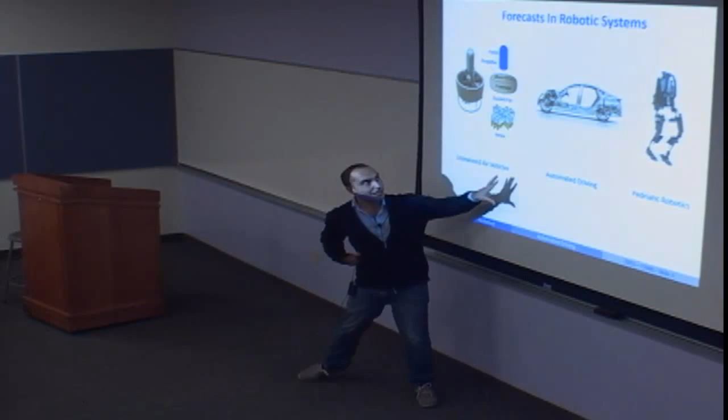I've been working with robotic systems in the past. This was an unmanned flying vehicle at Honeywell in 2002. We were the first to have these big machines flying around, used by soldiers. A lot of my activities are on automated driving, autonomous driving. And more recently I've been working on a project with Kazerooni doing pediatric robotics.

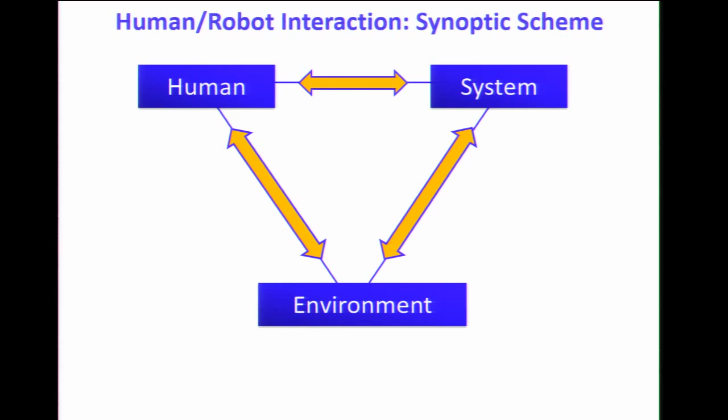So I work with robotic systems, and if you look at all of this, what they have in common is a human actuating or giving commands to a system that moves in an environment perceived both by the system and the human. In the case of cars, which I know best and work with all the time, there's a human that sends commands to a vehicle that moves in an environment perceived by the human and the vehicle, and the loop is closed.

The main point of my research is forecast. My lab focuses on the use of forecasting control, and I claim that we can drive pretty well because humans use forecasts. Actually, I'm giving a strong statement: probably the most interesting control problems left are the ones handling forecasts. Otherwise they're either impossible or too easy.

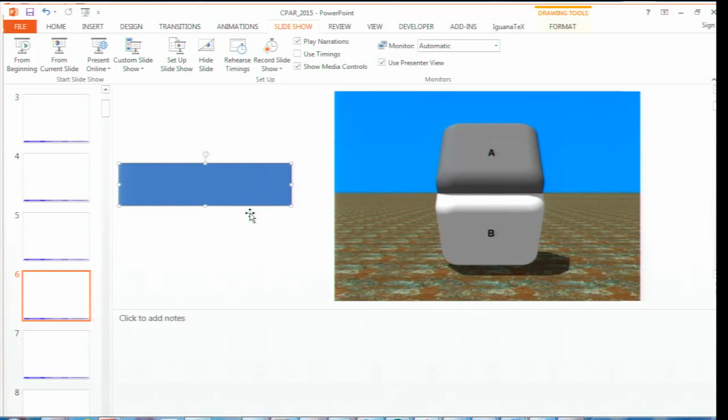You don't believe? Okay, I'll show you that it's true. It's amazing, when I saw this I said okay. And because there's a lot of stuff, look at this, I'm just hiding this part so you don't see. I'm going to hide the part where it doesn't give you the 3D perspective.

Come on... yeah, same color. So again, your brain forecasts colors a lot. You have forecasting mechanisms, it's quite amazing. This is probably one of the most interesting things I've been interested in for the past 20 years, the use of forecasts in control. Amazing, right? It doesn't look the same color, but it is the same color.

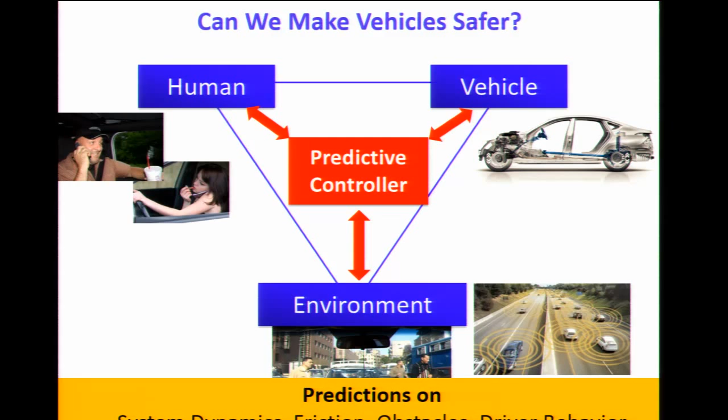So how do we design a control that forecasts the vehicle dynamics, the environment dynamics, and the human behavior, so that we make the whole driving experience safer, or robotics experience safer if you change your systems, and eventually you can make it autonomous.

So again, two goals: overview of my activities, since this is a Cpar seminar on human-vehicle interaction, and one research result. I've chosen analog optimization as an example of something a bit different from what's out there, being futuristic with what we should do at university, looking maybe 50 years ahead.

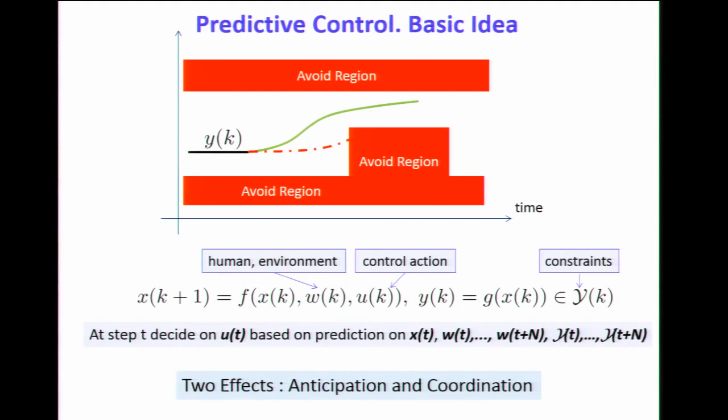So what are the challenges going from this simple idea of using a forecast in your control to making it work? Where do I start from? Three questions: what is a good model abstraction? Do I really need forecast? What is the value of uncertain predictions? Do I need to use forecasting control? And how do I make it work? Where do I start from, do I really need it, how do I make it work?

So I'm going to use this part, a good model abstraction, to tell you a little bit about our research activities, and also as a message to young graduate students: know the system before trying to control it. In predictive control design, I'll tell you about one research topic here. If you look at the car, the human moves the vehicle. Today, the way we actuate the car is by sending a signal to the low-level control systems.

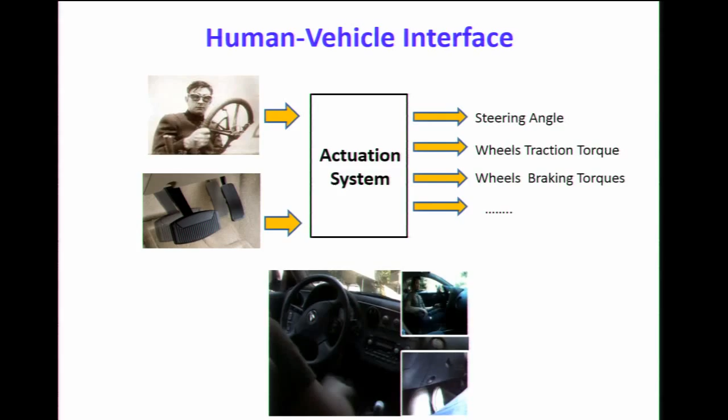When you change your steering angle or push the brake pedal, you're really referencing a low-level control system. For instance, if you push the brake pedal, you're sending a PWM signal to an electronic control unit, which changes the pressure inside the braking pads.

And really, what you want is not what you get. So this is experiments that we do, but there is uncertainty in the low-level actuation.

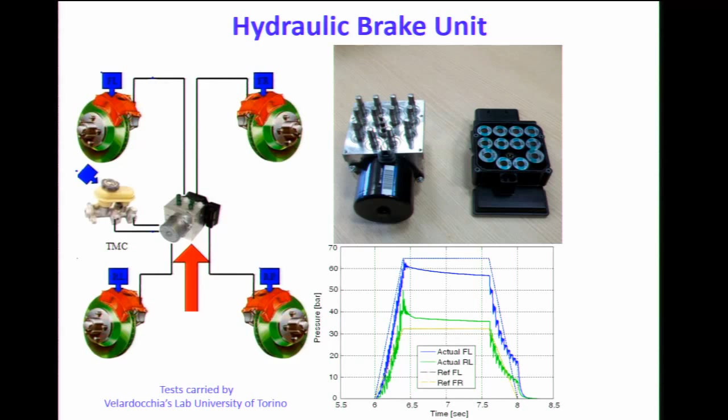And by the way, if you take a modern car, there's a lot you can do. You can brake all four wheels, actuate the engine torque, and also distribute the torque front and rear. And of course you can control steering as well. This is a Hyundai Genesis 2015, it has all these forms of actuation. Interesting control problem there.

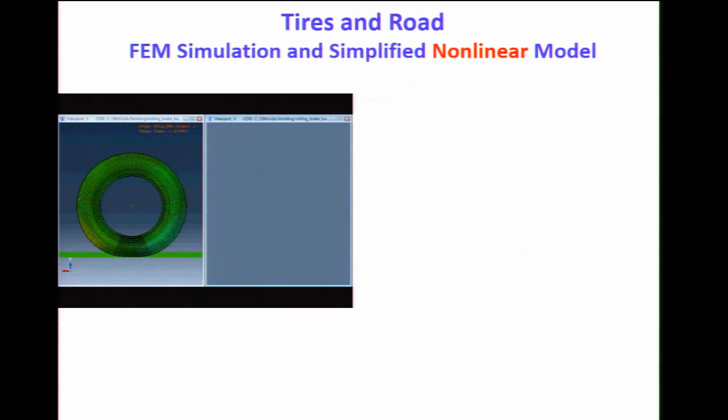Now that you've sent the signal, the vehicle moves in the environment, and there are two types of interactions. The vehicle is a box. The lower side interacts with the road, the asphalt, and around you with obstacles. So the tire is the reason why things move, and these are tough objects, viscoelastic materials. There's an entire conference on tires.

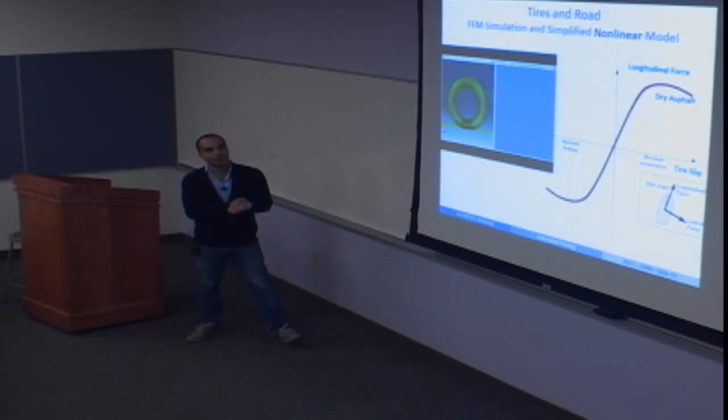This is the force. What I've depicted here is the force to the tire as a function of what's called tire slip, the difference between the vehicle speed and the wheel speed. It comes from finite element models of the tire deforming under acceleration. A lot of people doing vehicle dynamics use this type of nonlinear model. If you accelerate, your force increases up to a point where the tire slips and you actually get less traction. The same happens with braking.

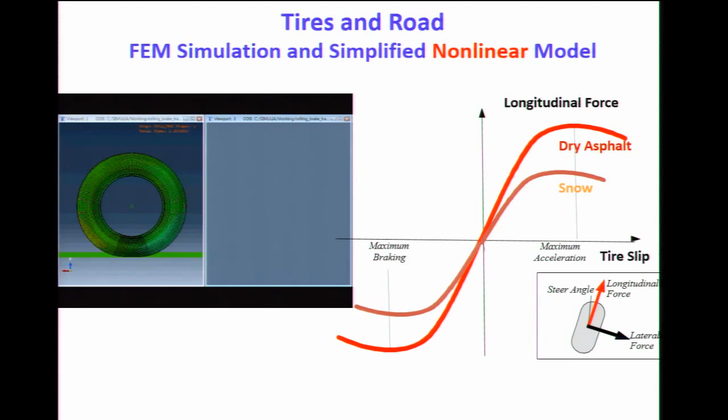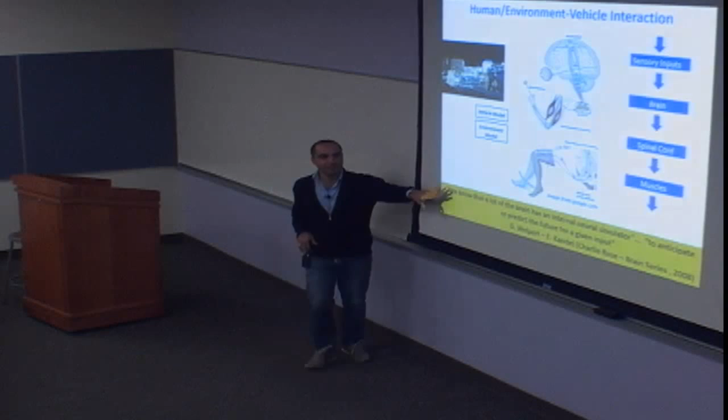And once the car moves in the environment, this environment is perceived both by the car and the human. This is where the neuroscience community has been focusing for many years. What has changed in the past year is that there's a Nobel Prize - Eric Kandel is a Nobel Prize neuroscientist - and they've embraced this idea that we have a simulator, a forecaster in our brain, a model that makes forecasts.

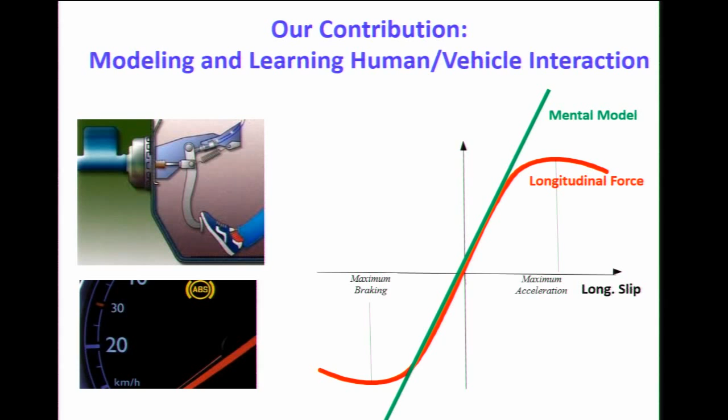And if you use this concept, you can explain why we need traction control and anti-lock braking systems. Your mental model in the brain is a linear model. A lot of our brain's processing for mechanical systems is identifying simple linear or piecewise linear models. So we have a simple linear model that works okay in this region, but when your wheels are slipping, in acceleration or braking, you need a control that takes over because there's a model difference. This is why you need traction control and anti-lock braking systems - those are production controllers that help you in this region.

So what I've been doing a lot of in our lab is focusing on real-time data-driven human driver models, and the reason is to have better human-vehicle interaction and also fast training of less skilled humans.

Imagine if I want to teach people how to do complicated parking. Can I design algorithms to teach people to do parking?

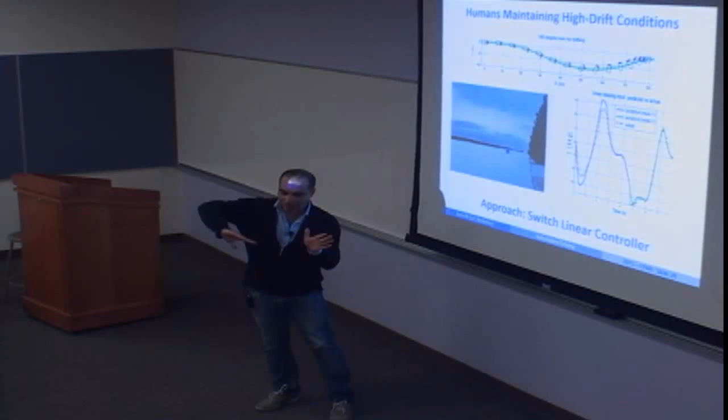This is in Michigan on snow, and only expert drivers can do this. Basically what they do is first destabilize the vehicle, go into a high drift condition, and then stabilize it back and rotate. So we were asking, can I learn from the expert driver, and can I teach this?

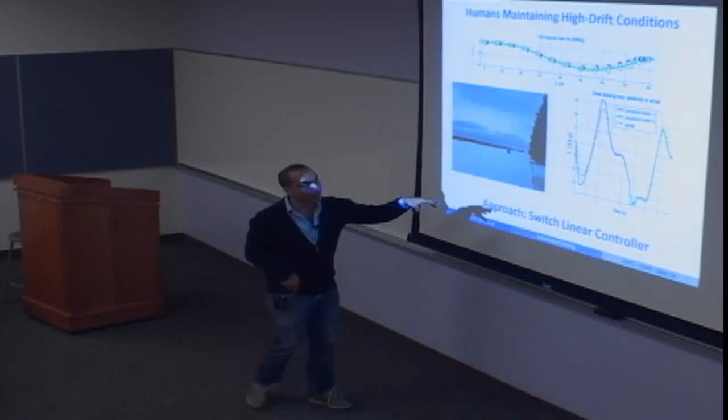It was interesting research from Teresa, who is graduating in a few weeks. A switched piecewise affine model, with two modes - destabilizing versus stabilizing - works extremely well. So well that we can actually use the same model identified from the driver to run the car autonomously. So you would see the car doing autonomous drift and 180-degree maneuvers from this controller learned from the driver.

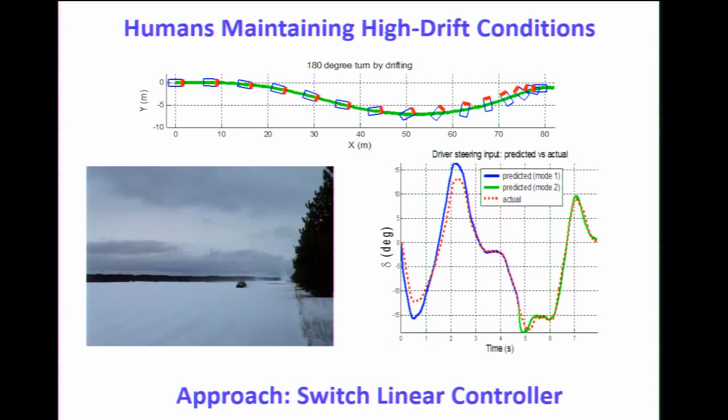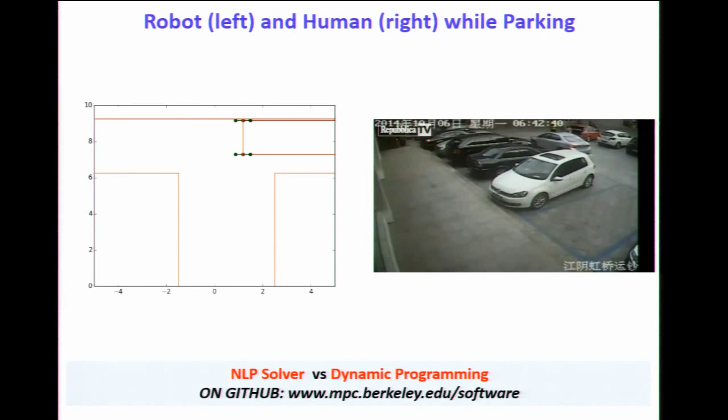It is a very simple problem which is extremely difficult, especially if you give them the constraint of running on a real-time electronic control unit. We have posted some simple GitHub code to solve this type of problem.

Highway driving - this was some of our most recent research where we asked people to drive cars and we recorded external data, the cars in front of you and around you. We learn the driver behavior based on this historical data, identifying a hidden Markov model, a Markov chain from the transitions between control strategies.

The message here is that 5 years ago we proposed this personalized driving concept - basically the car drives the way you used to drive if it is safe to do so. And it works pretty well.

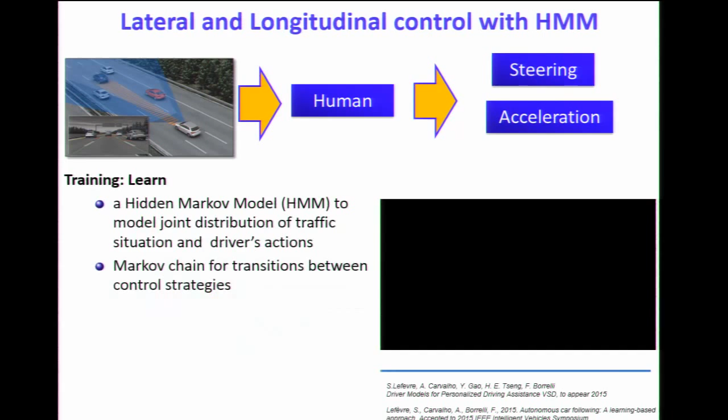So here's a model, you can see two examples. For the same rate, this is a car keeping the lane, and having a distracted driver doing what is called lane departure - basically you are exiting your lane.

With this type of model, we can forecast 2 seconds ahead - here is the lane departure, 0.2 seconds earlier at 60 miles an hour, which is a lot compared to production systems.

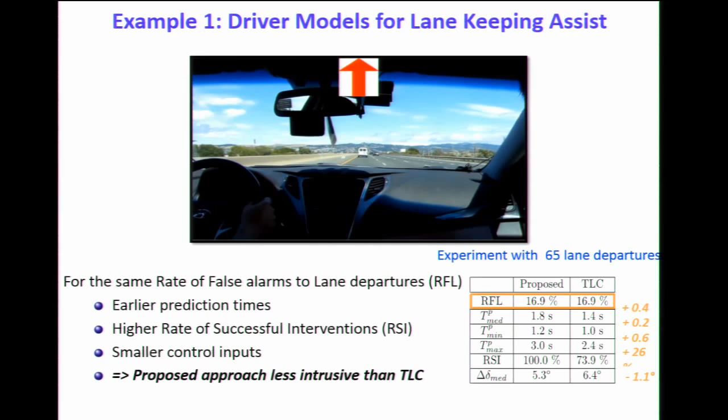The other thing we can do is show, according to two metrics, the quality of the personalized model versus an average model. The fact that this is lower means the personalized model captures your driving style better.

So basically, next time you drive, we'll record your data, make a personalized model, and use that model to make your car safer when you drive, or to drive the vehicle in autonomous mode when that becomes possible.

Okay, so this was a big picture of a little bit of our lab activities. Just 5 minutes on going back to useful model abstractions.

We have nonlinear dynamical systems, coming from Euler equation of motion, static tire nonlinearity, inequality constraints on your safety region, and uncertain forecasts coming from drivers.

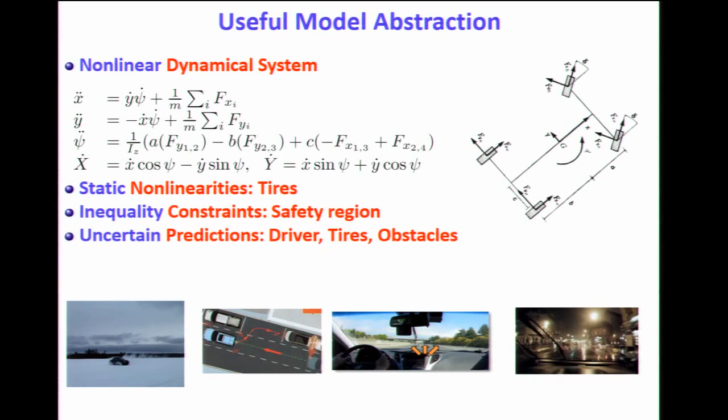Last 5 minutes is about control design. How do I make this work? How do I use this forecast in real time to control the system? Well, if you look at the challenges, this has to run on an embedded platform. This is one of the biggest challenges in my lab.

Basic setup: repeatedly solving a finite time optimal control problem where new forecasts and new states come and are updated each time step. You're looking for a horizon n, and a set of n feedback policies that minimize the costs subject to your system dynamics and constraints on inputs and states for all uncertain behavior. This is what the world of MPC, or Predictive Control Community, does.

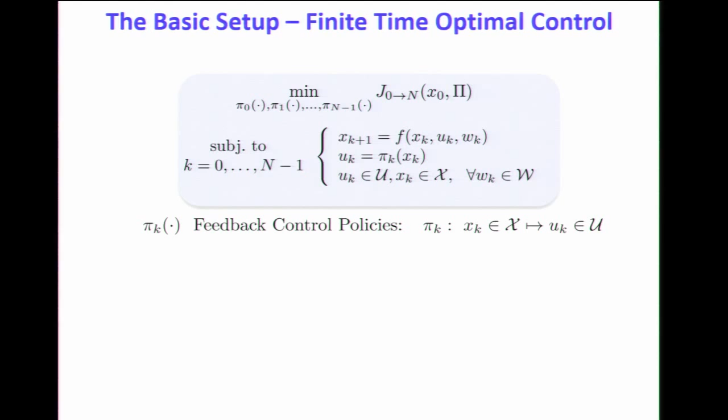There are really two aspects to it. How do I compute this? And the second one: if I'm not able to compute exactly the same problem, how do I compute a simpler problem that fits an embedded platform?

5 minutes. How do I compute that? You have 2 options. One is do it offline. There's a lot of work offline, and then online is just a lookup table. So pi, your feedback policy, is a piecewise affine policy.

Dynamic programming to compute this pi is one option. We teach this in class. Basic rule: n greater than 5 is impossible. You cannot grid really in 5 dimensions.

The second option, the other extreme, is online. So offline, you just set up your problem - these are my costs, these are constraints - and then in real time, you solve an optimization problem. Nonlinear predictive control is one choice. The basic message here, the basic rule, is that you want to avoid homemade solvers. Do use solvers from the operation research world because they've spent years on these things.

So what has changed in the past 15 years? I think I gave this presentation a few months ago. I was thinking about it. And really there are a couple of things.

First of all, excellent open source convex and non-convex softwares are available. So you should really use them. IPOpt is one of them, among other things out there.

The other one: if you see how people in robotics do obstacle avoidance, they don't solve a mixed integer problem, right? There's a lot of sampling, particle-based filters. And there's only one reason for this.

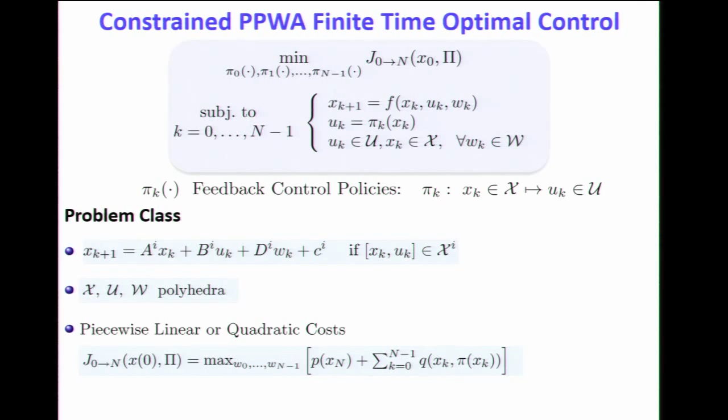And this was what my PhD thesis was about. I was looking for a special class of real-time optimization problems that had a simple feedback policy that could be pre-computed. This was switched linear systems, polyhedra, and piecewise quadratic or linear cost. And this policy looks like a complicated thing.

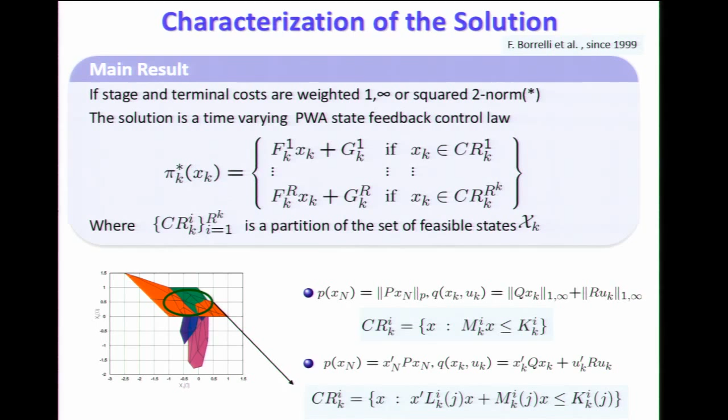It's piecewise affine, affine pieces on regions, on objects, and these objects have strange shapes, but there is software to compute this. If you buy a Mercedes-Benz with adaptive cruise control, you see this lookup table here? The adaptive cruise control is this pre-computed feedback policy with my tools. Engine control today in a lot of companies is done in these ways.

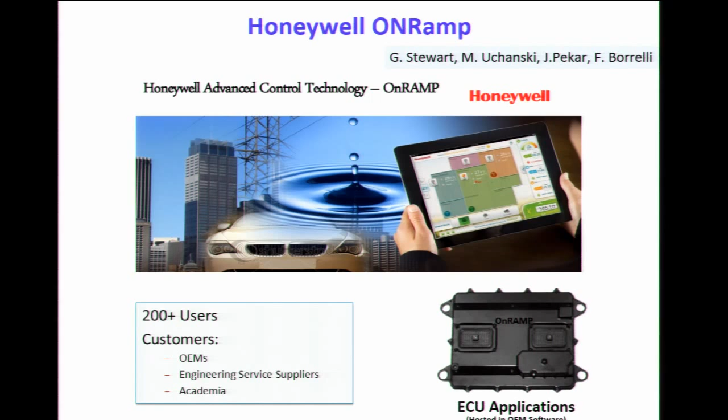This is a product that I've worked with Honeywell on, while I was at Honeywell. Okay, last message. One last result from my lab.

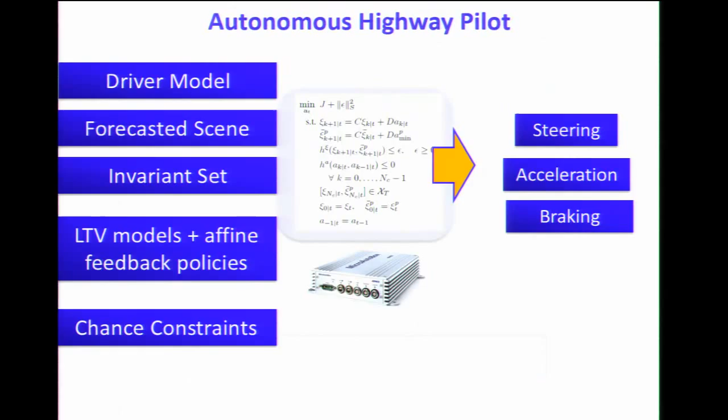By the way, in terms of autonomous driving, we have an open source architecture. If you want to work on autonomous drive, you can download our stuff, and you can put your best estimators, your best controller, your best path planning algorithm, and pull data from downtown Berkeley and simulate it. Everything is in ROS, Python, C++, so you're welcome to use this and download it.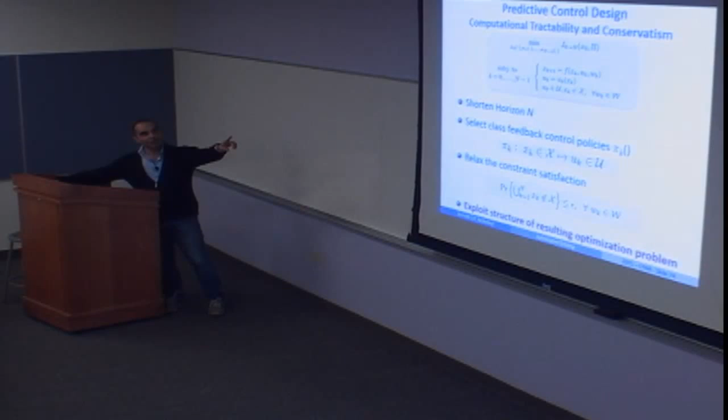Solvers are getting faster, but CPU is not. This is the clock of CPU, CPU clock over the past years. You see it's stuck at 4 gigahertz. So they just put multiple CPUs, but over the past 10 years they really can't get faster because of heat dissipation.

By the way, in the automotive world, this was a shock to learn. They went now in the new ECUs that have multiple cores, and they turn the multiple cores off. Because actually, sometimes it generates conflict, and the task becomes slower than what they really need.

So short story, we've been looking at ways of speeding up computation of solvers, and we went back to analog optimization. This board is an analog board. It solves a QP. Actually, the biggest part is an Arduino to connect it with the digital one, but it solves a QP, this QP here.

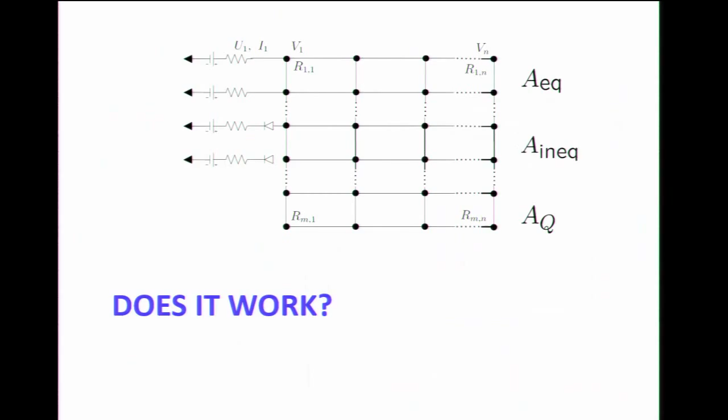Solves a QP. I'll save you from the theory and the Lyapunov stuff and so on. It's all nice, but the most important thing is it works. This solves the QP. How could I go through this in 30 minutes? I don't know. Here it is: a QP with 21 variables and 24 constraints, 14 constraints plus 10 equality constraints, and it's faster than any digital system out there.

So we went back. It's called analog optimization. It is the equilibrium point of an analog circuit, and it's the solution of a QP. It's an old idea, it goes back to the 50s. There's somebody here, Chua, at Berkeley, who was doing this. Our circuit is much simpler and faster than what's published out there.

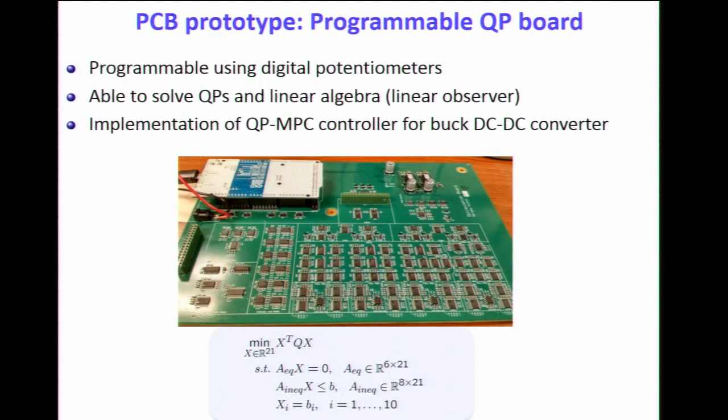These are the results. It doesn't need, by the way, any operating system. It doesn't need Linux. You don't need to update from the cloud.

That's it. Thank you. If you want to know more about this, there was a seminar today from my PhD student, and there is a lot of information on the web. Thank you.

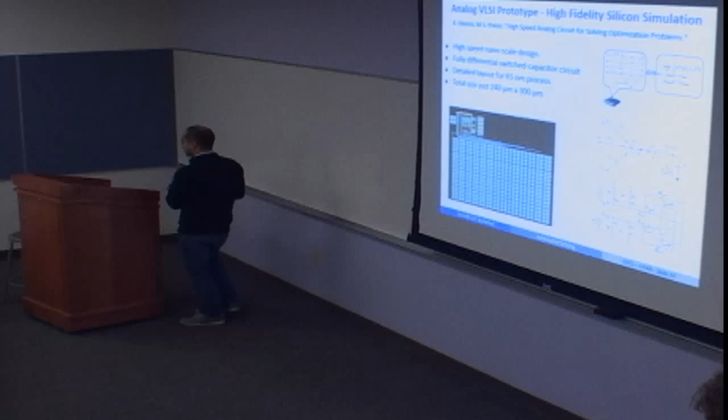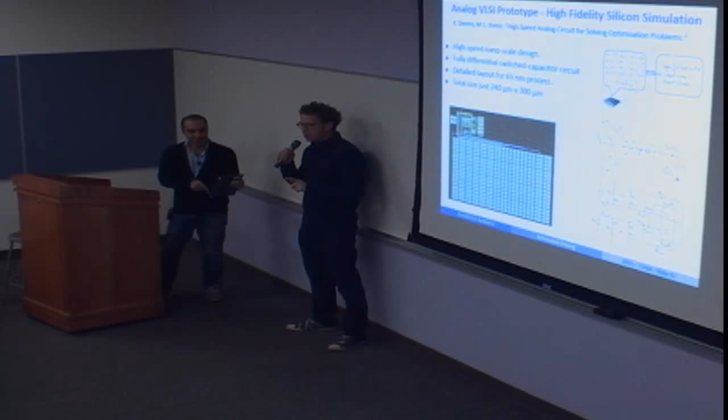Sorry, any questions from the audience? Okay, I'm afraid if I ask you, it's gonna get too long. But we can follow up later.

I didn't know you're working on actual analog hardware to solve these problems. The key in MPC is that you have to be recomputing during execution, right? Yes. And so it seems as though there's also some verification or performance guarantees you need to have, right, as well, because there's some limit to how much time you have to compute, so everything has to converge, and you have to be guaranteed.

Very interesting question. This is one of the biggest problems of our community. Can you guarantee convergence in a given time for these iterative algorithms. You cannot. But the good news is that nobody can. Even other sampling-based methods are not guaranteed to.

Terrific. Thank you. And our next speaker, fantastic. I'm so glad he's here.

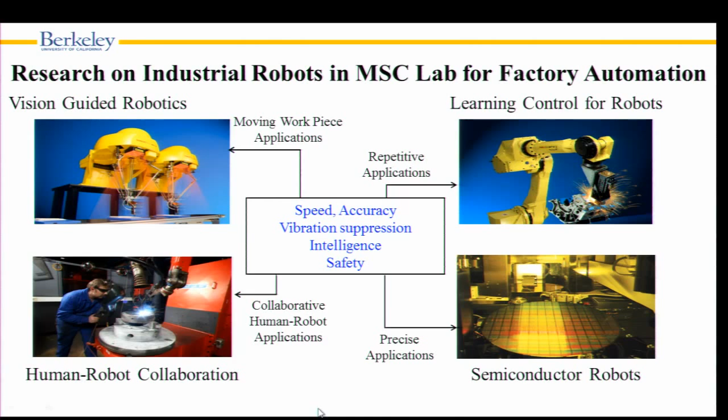It's another robot-human collaboration, but in a factory environment. My lab, called Mechanical Systems Control Lab, does deep research into industrial robot control. We research speed, accuracy, vibration suppression, intelligence, safety, etc.

And one of the themes is human-robot collaboration. In this talk, I'll cover two topics: one is human-robot collaboration in peg hole insertion, and another is safety, when the robot and human are working together.

So human-robot collaboration in peg hole insertion has several keywords like teach-through teaching and learning skills from human, and so forth. Two researchers, Te Tang and Hsien-Chung Lin, are working on this topic.

It's robot assembly. It's all over the place because manufacturing requires lots of assembly. And if you look at the tendency, it's becoming smaller dimension, tighter tolerance. Tighter tolerance is a very important aspect. And also shorter product life cycle, so it has to be flexible.

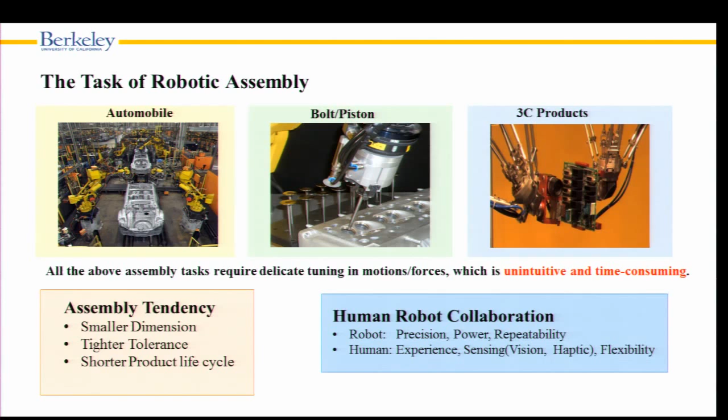So human-robot collaboration may take place. Robot is very precise. Human has lots of experience, and finds how to do things well. So we take advantage of that. And this is not a new problem.

My advisor, Dan Whitney, worked on this almost more than 40 years ago. He was working on this type of thing. I didn't talk with him at that time, but now...

If you look at the traditional approach, for the approaching part, you use a teaching pendant to bring the robot peg close to the hole. Then you have to align it fairly carefully with the teaching pendant, because if you can come close, you don't have to do tilt compensation. But it's tough work. Then traditionally, force damping control was done.

I think if the tolerance is not that great, maybe this is good enough, but we would like to do it a more flexible way. By the way, the teaching pendant is one of the most time-consuming parts of robot operation. People would like to stay away from teaching pendants.

So we do teach-through teaching and then learn alignment skills from human. First, this part is essentially teach-through teaching. Instead of moving the robot by pendant, in this case Te is moving the robot towards the hole. This is obviously force control in action, because the robot moves in the direction he is pushing.

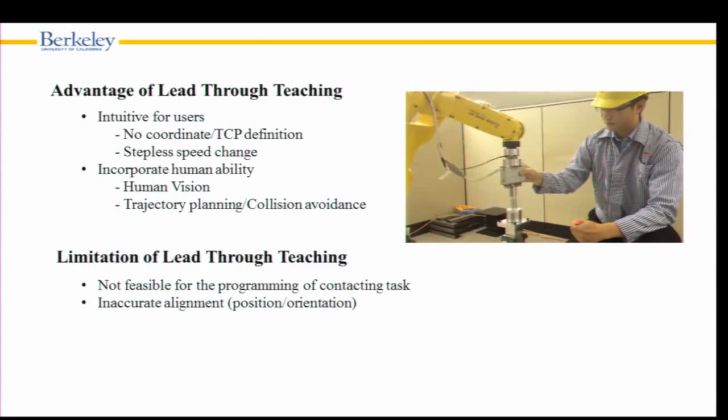Now, lead through teaching makes it easy to bring the peg somewhere in the vicinity, but if you try to do everything by it, nicely holding and lining up the peg and so forth requires lots of effort. Also for safety reasons, you don't want to increase the bandwidth of the control loop too much, because human and robot are so close. So it's fairly easy to bring the robot close to the hole, but it's not likely that the hole and peg are already lined up.

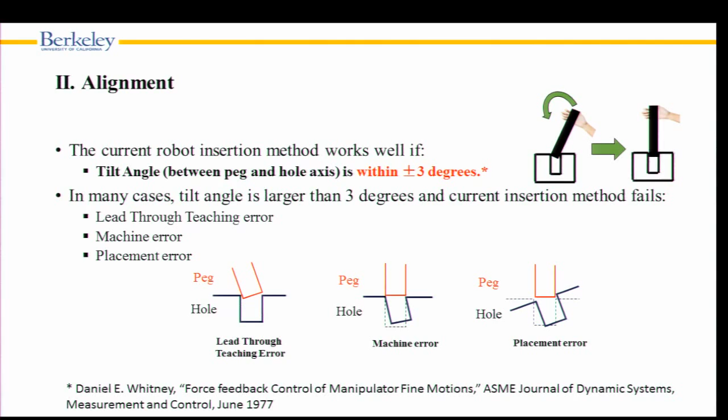What will happen is you can come close to something called 3-point touching. If you are very close, the robot may already be touching the hole at 2 points. But if it has an angle, there are 3 points. Most previous research assumes you can come to 2-point contact and then insertion starts. But it's more like 3 points.

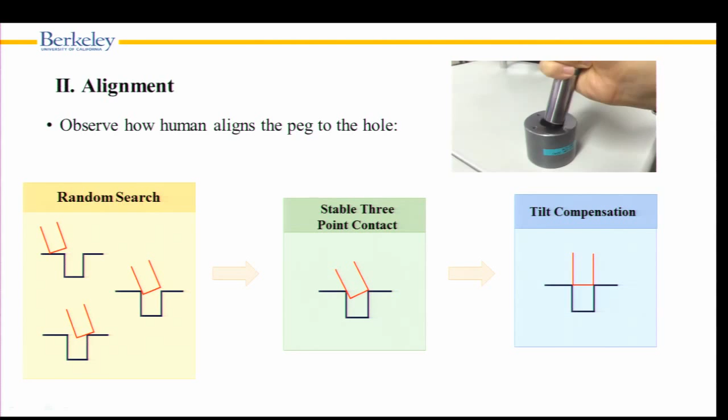So this is how typically a human does it: find the hole, then correct. My student essentially figured out that if you come to 3-point touching, you can measure with the force sensor, force in the X, Y, Z direction, in the force sensor direction. And based on that, make a prediction of what the tilt angle is.

So if you plot tilt angle versus this estimate...

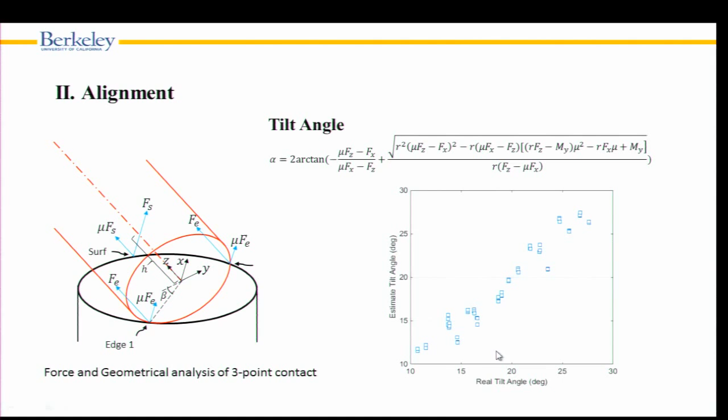Essentially force data is utilized, how you don't have to worry at this stage. But you plug in the formula, and you can expect what will be the estimated angle. And it comes very close to the 45-degree line.

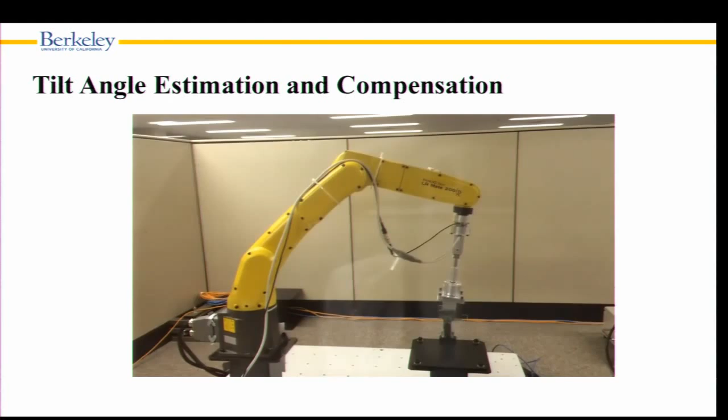So make use of this one. Then essentially the robot comes to the 3-point contact, then easily the hole and peg almost line up, coming to this stage easily. And once you do that, you have now the insertion phase.

In the insertion phase, what people normally do is, if you look at the peg, you can move the peg in certain directions. And there is also reaction force from the hole. So those two should be nicely correlated. The human does a very good job here.

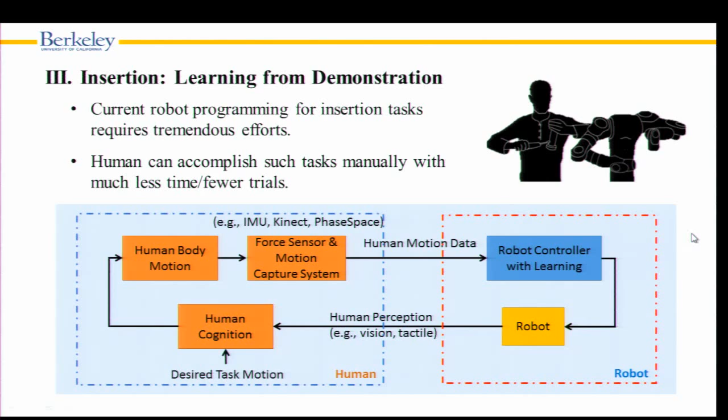So we try to learn what the human is doing here. And once such learning is completed, essentially this part is gone, and the robot can start doing all the tasks himself. So essentially force and velocity, in which direction this peg should be moved, are the two key variables.

Certainly the relationship is not linear, it's quite nonlinear. So the objective is to produce a nice mapping between force and velocity information, and use a regression model approach such that estimated velocity and real velocity may be close to each other.

This essentially fits the experimental data of what the human is doing. So you get lots of data, and then the process is, first, as the peg moves toward the hole, there may be some section you'd like to throw away because it's not quite relevant to the insertion part. So a support vector machine picks up the component relevant to the insertion.

Then lots of data is collected. And as the human performs, each time he does it a little bit different speed, and that is normalized by the idea of time warping. Then the regression model can generate results fairly close to what the human does.

So the regression model, the Gaussian mixture regression model - essentially this is experimental data relating force versus velocity. In a simple case both quantities are 1-dimensional, but in reality it has got 6 dimensions for each force and velocity. Then essentially this relationship is represented in terms of a probability density function, a Gaussian model. By identifying this, you can do the job.

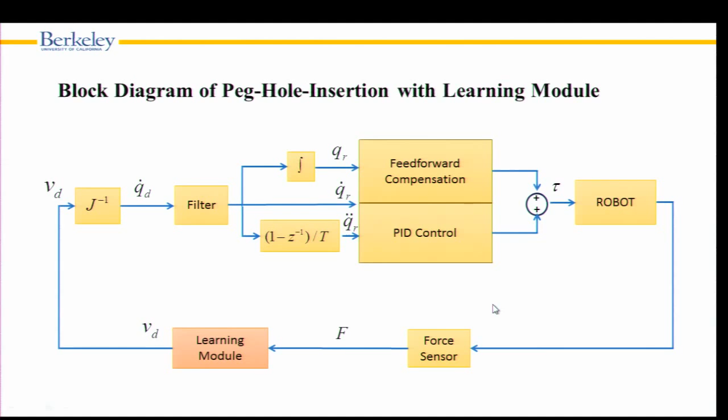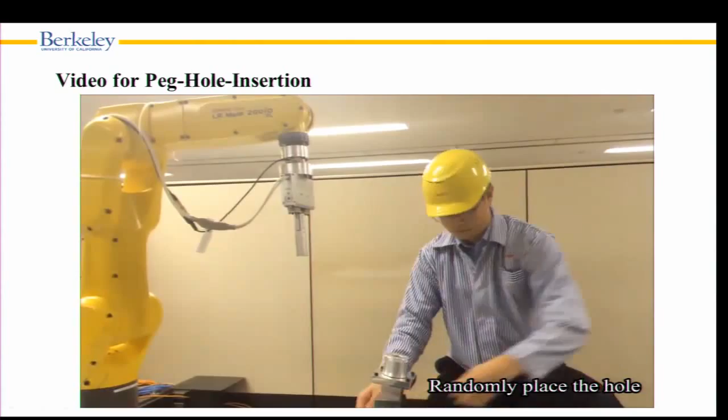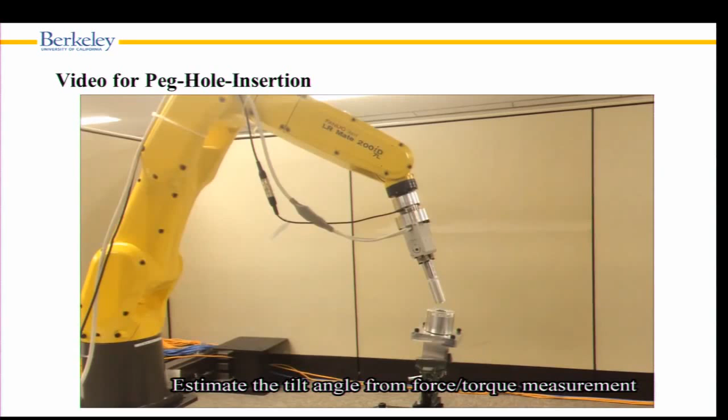Now this whole package is essentially going through. This is first the teaching part, to come to a reasonable 3-point contact. Then the angle is estimated from force data, and it becomes a 2 or 3 degree error.

From that point on, insertion becomes easy. Then based on that learned model, this insertion is achieved.

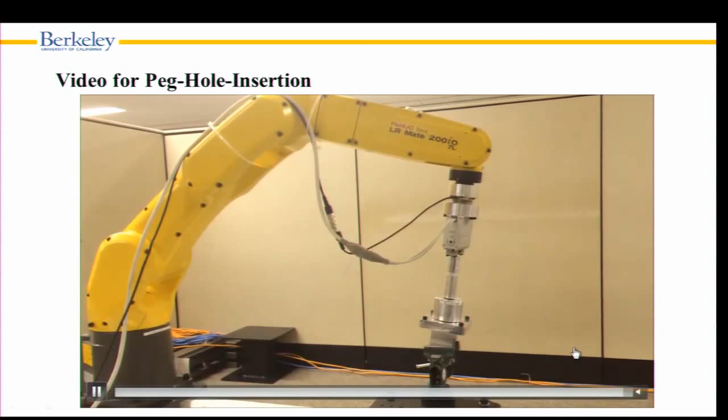So that's one story. Another story is coming from Changliu Liu, who is working on algorithmic safety measures for intelligent industrial co-robots. Now people figured out that the future factory should have both robot and human working together, taking advantage of the strengths of each, but there are lots of interesting issues involved.

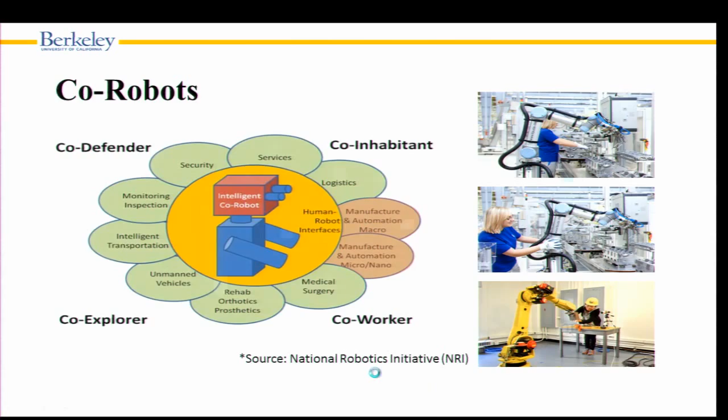The figure is from the RFP for the National Robotics Initiative. Obviously, given the advantage of robot and human, we try to make synergistic use of the two.

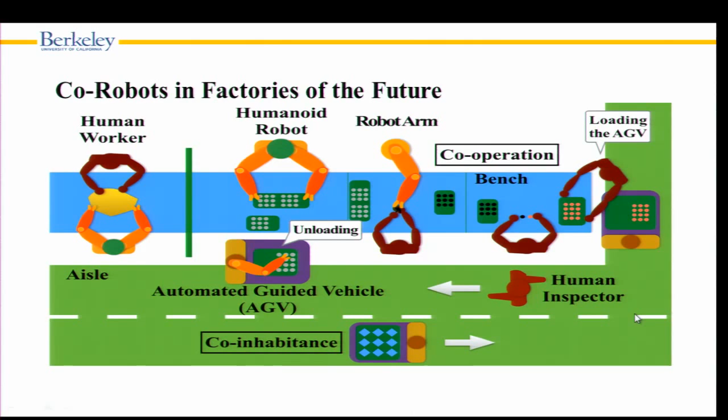And then future robot factories might look - even already now, some factories start looking like this - with robot and human collaborating in various ways, including the robot cart moving parts from one station to another, while a human inspector walks around.

So lots of technical challenges. If in the environment you would like to ensure safe operation, there's sensor perception - how human motion may be recognized by the robot, the human recognizing the robot, and so forth. But the key issue is safety.

So we try to ensure safety, and there are several protection levels. The first is essentially recognizing each other, that we are close to each other. People may not know that the robot is coming close.

But essentially we try to give responsibility to the robot - the robot finds the human in the vicinity. This requires sensing and perception, cognition, motion planning. The second stage of protection is when, unfortunately, some contact takes place - such contact has to be immediately sensed.

And in some cases, if you can put a soft mechanism - either the joint may be a little bit elastic, or the robot is wearing some jacket - that might be another level of protection.

Industry people essentially came up with a very simple idea. This is the Fanuc green robot, essentially intended for human-robot collaboration. What they did was control the impact - they decided to move at a fairly conservative speed, since impact is essentially momentum, mass times velocity.

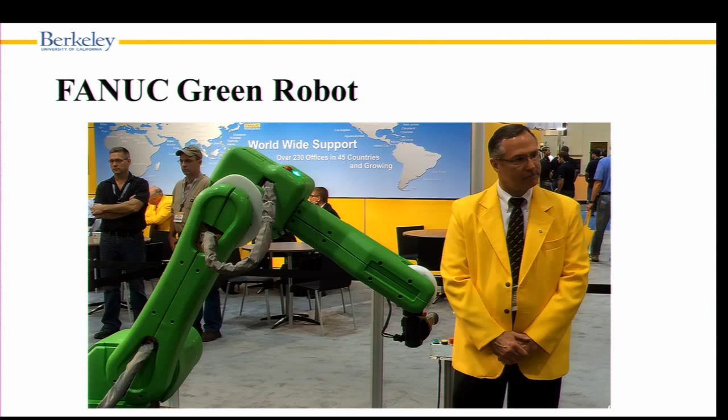So if you can reduce one, in this case reducing velocity, make the momentum go down. Move slowly, and also be surrounded by scanner sensors to find the human. And then if something touching takes place, they have got a very sensitive force sensor in the base of the robot, so it immediately detects that something is happening. If it's an unscheduled, unplanned collision, the robot immediately stops. So that's something like what a human does.

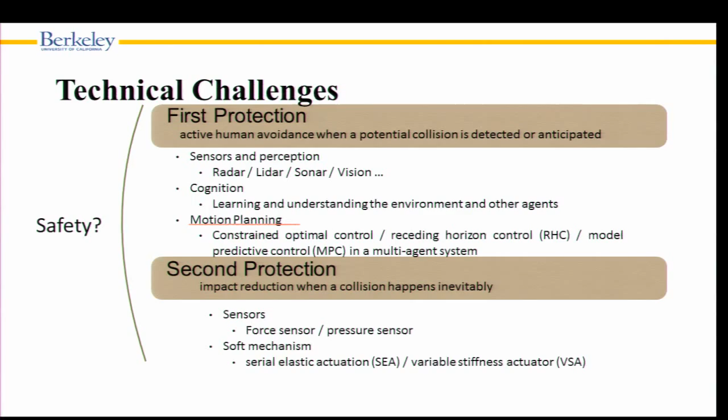And in Changliu's case, she wants to do some more from a motion planning point of view. Given data, she can create a situation where the robot predicts that a collision may be taking place. Then under that scenario, what kind of motion planning, actually trajectory planning, has to be done in real time. So to do that, essentially there is some hard constraint.

Try not to collide with each other. In human-to-human interaction, you might call it something like a social norm. You don't want to hit anybody. But even if you try to avoid hitting anybody, there is some uncertainty, whether this guy is coming this way or that way and so forth. There are certain uncertainties which have to be taken care of. If in that situation, the choices you can make may be further limited to deal with that kind of uncertainty.

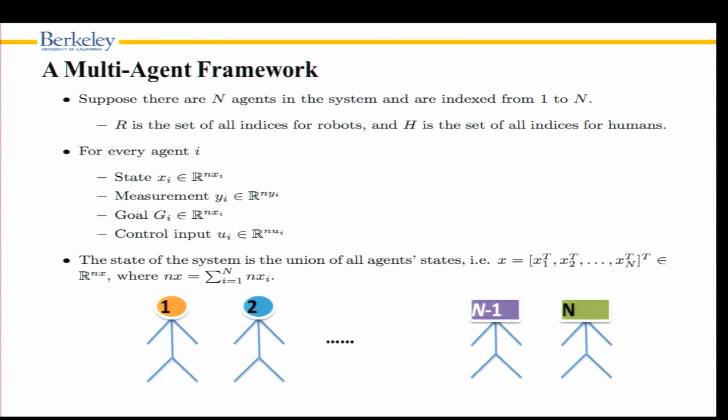So essentially, this robot senses all the information, and based on that, the robot controller decides the proper action. Now, essentially, it's an optimal control problem because the robot is there to accomplish a certain task. So what will be the control strategy to accomplish that task? And if you can forget about, for now, bumping into humans and so forth, it's just a standard optimal control problem.

You can use LQR or something to reach there. But then you have to think about that if something is there, you have to avoid it. Now, if you try to avoid a certain obstacle by working on this set, there's a human, and so forth. It turns out that the space you can play with is not convex. It's rather a non-convex optimization problem. So instead of doing that, what Changliu does is try to find

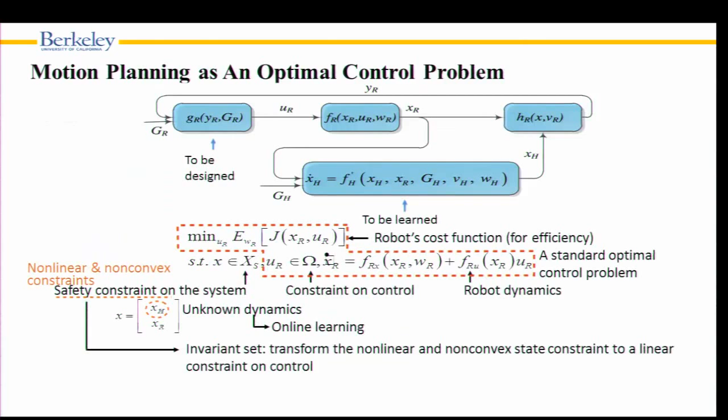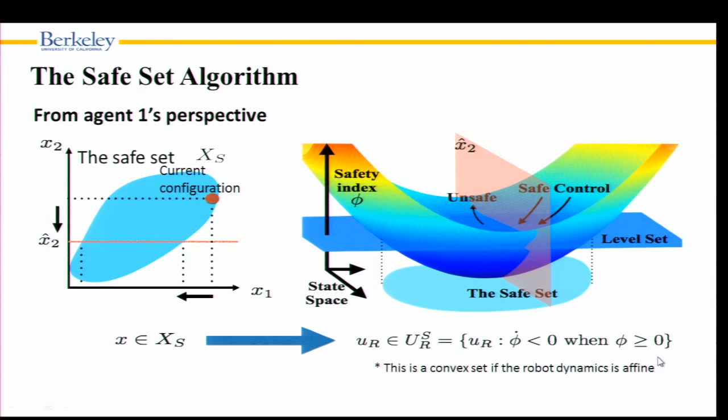And for doing that, instead of worrying about this X directly, she looked into what she calls the safety index. In state space, she makes a function phi, which is a function of state. The function has to obviously satisfy certain constraints. If phi is positive, phi dot is always negative. And she can cook up that kind of function. And if phi is behaving always like that, phi will go below what she calls the level set. And if it goes to the level set, it's guaranteed to be safe.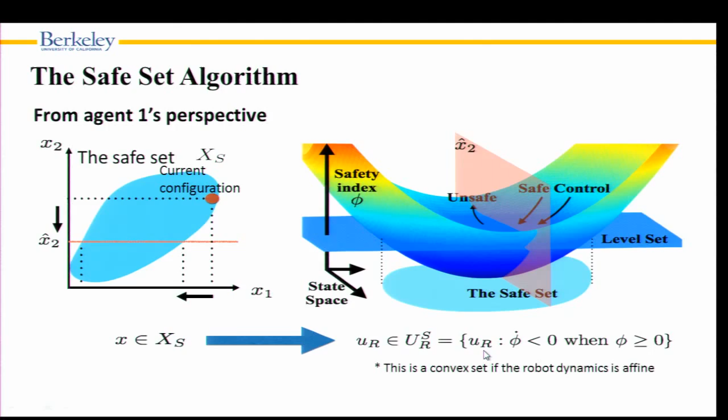So instead of X staying in XS, she would like to make sure that the actual U the robot applies belongs to this set. So without essentially first worrying about what the robot obstacle is, we just first solve this optimization problem. That essentially decides the so-called efficiency controller. The efficiency controller simply achieves the original task objective. Then we look into where the danger is. Instead of searching X space, she goes into UR space and selects the proper UR. So conceptually that part is done, but something that happens is if UR does not belong to the safe control set, essentially find a point where it has got minimum distance and do this.

Now, something dealing with uncertainties: the robot is again here, X1, and another guy, or group, may be moving down here, but not quite exactly to this point. There's some uncertainty involved. But then in that case, pictorially, XS, where X can be, is further narrowed down.

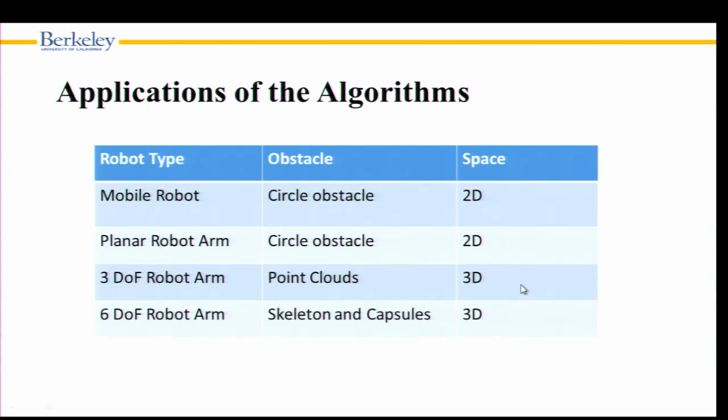Essentially, she figures out what will be the safe set control for each of these X2, and finds a set such that wherever X2 ends up, she can still ensure safety. She simulated this idea on mobile robots, planar robots with 3 degrees of freedom, a 6 degree of freedom robot, circular obstacles, and so forth, in 2-dimensional and 3-dimensional space. It's a kind of interesting simulation.

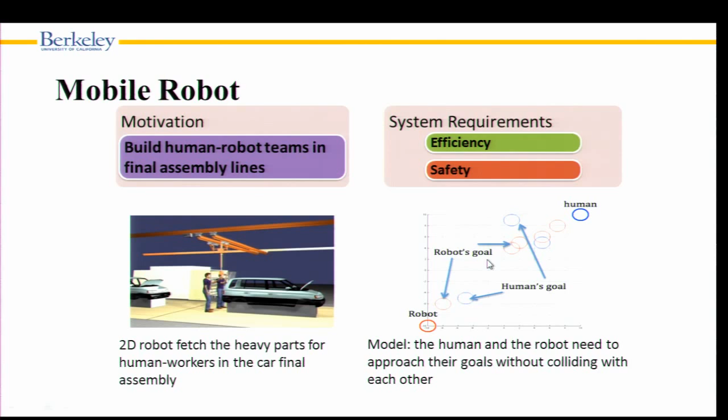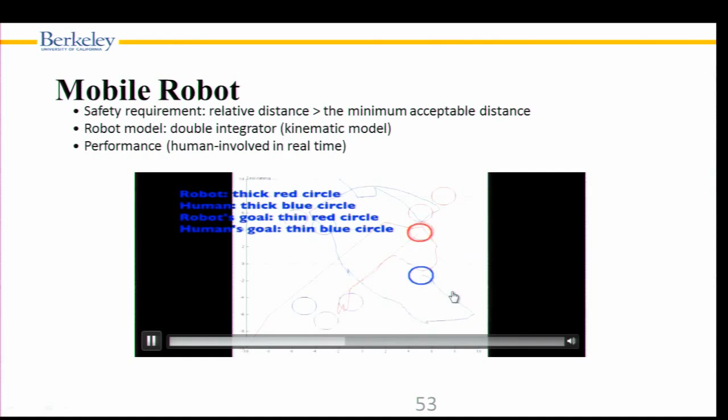The first scenario is a mobile robot moving around and helping a human. The human has got some task to do in the blue circle, and the mobile robot has to go to the red circle and accomplish its task. The mobile robot can go there as long as it's not conflicting with the human, but when the blue guy, the human, comes close, the robot stays away from the human.

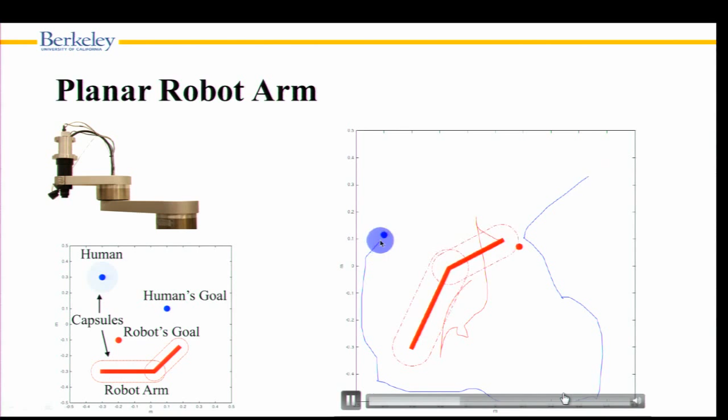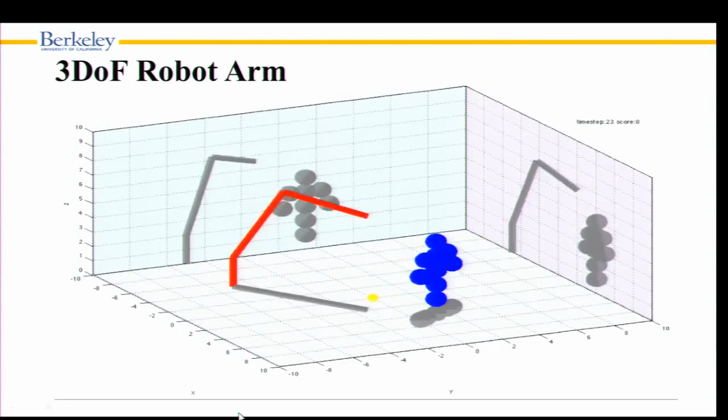This is a 3D simulation. In this case, the human is represented by a point cloud. The robot is supposed to pick up this yellow thing. When the human comes close, the robot stays away so as not to hit the human.

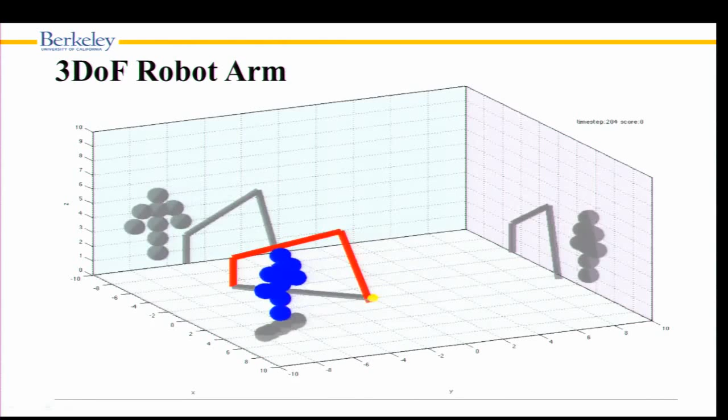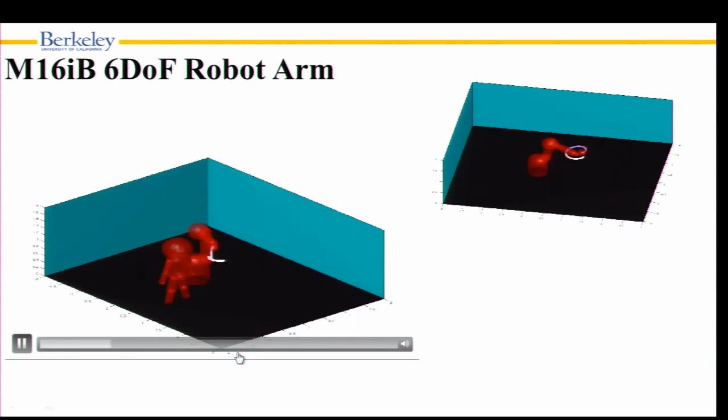This is more typical - we have this in the lab, an M16 robot arm, and this is its task. If no obstacle is there, when the human starts moving in, instead of precisely following the path, the robot starts backing away from the original trajectory.

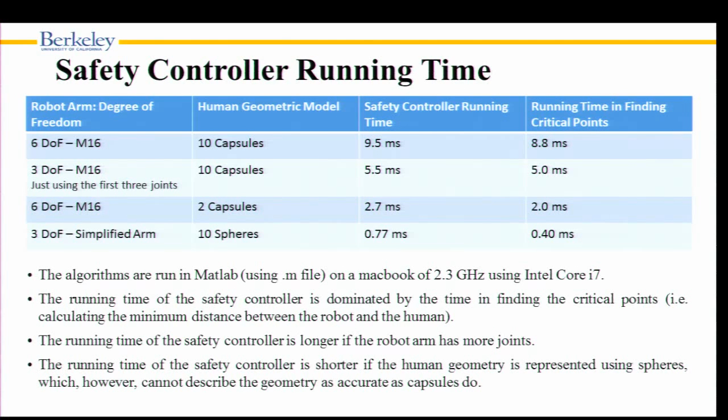For doing all of this safety calculation, this simulation uses an Apple computer running MATLAB on a MacBook at 2.3 gigahertz. Each cycle to figure this out took only this many milliseconds, but a good portion of that was used for figuring out the minimum distance between robot and human. If you attach some sensor to the robot's end effector that directly looks into the space, you don't have to do this part, so everything becomes very quick.

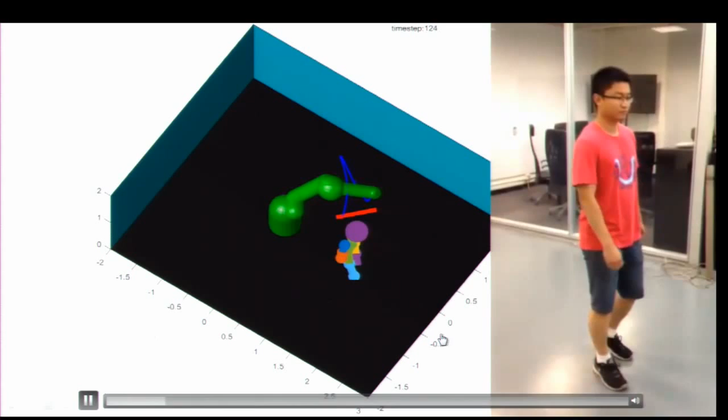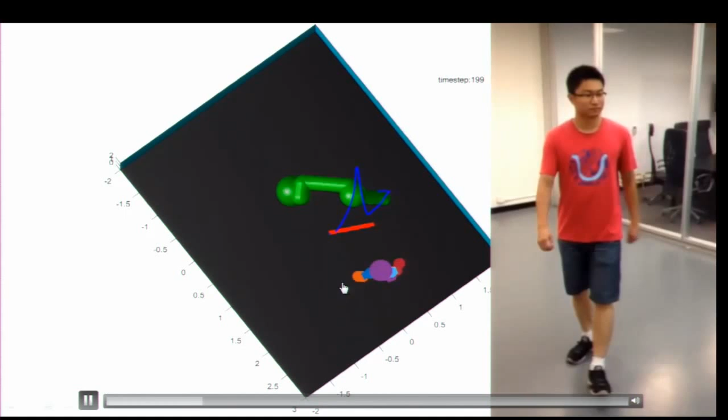The last simulation is a so-called human-in-the-loop simulation. Instead of jumping into the experiment directly, Tay is looking into a Kinect sensor and also a screen, and as he moves towards the screen, the robot tries to avoid him. The robot is supposed to move back and forth on this red line. This is Tay on the screen, and this is the real Tay - that's the kind of simulation.

The next level is to experiment.

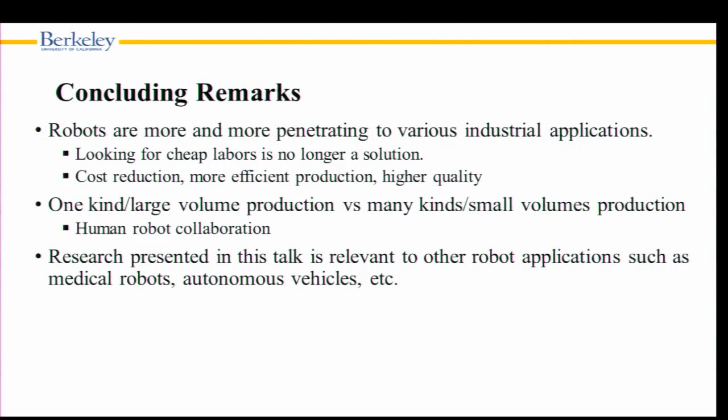In conclusion, robots are more and more penetrating various industry applications, generating lots of opportunity for interesting robot-human interaction. Some of the work we're showing about robot-human interaction here is not really limited to factory automation, but can be used for automated driving and maybe even some medical robots and so forth. Thank you very much.

Questions? Quick one for you, Tommy.

Have you started work on combining the two ideas, namely learning and safety? It seems one idea could be that over time you could learn to predict the motion of humans coming into the environment, so you could predict what they're doing and allow the robot to move faster to reduce the safety margin. Or vice versa - you could imagine the human getting a warning that the robot is moving into their space, so it would warn the human to move back. You could learn on both sides. I'm just curious if you...

I think the basic idea, for the second part, we treated the human as a very absent-minded agent, so from the safety point of view that might be good. But I think there's an opportunity the other way around as well. Also, teaching the robot humans' intention, learning humans' intention - we have not quite done that part yet, so we will be spending more effort in that direction.

Very good, because that's somewhat related to Anca Dragan's work - she's the new professor here. We should also talk a little bit about the segmentation project, because that's related to some work we've been working on as well. Terrific, thank you so much. Okay, thank you.